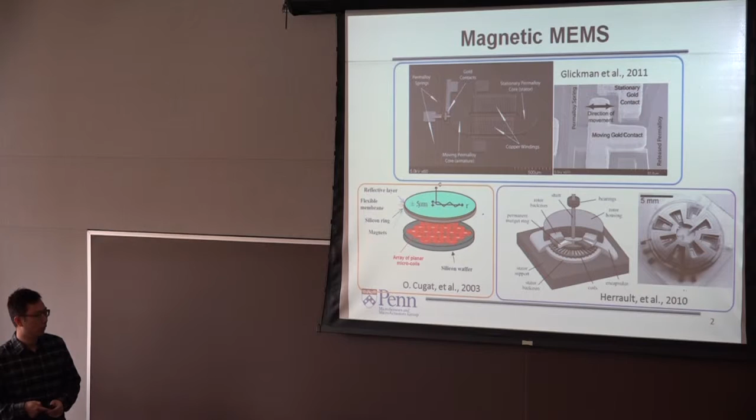Another example is a micromirror. This is very similar to the TI-branded DMD devices, but rather than using capacitive actuation, they use electromagnetic interaction here. And of course, one of the very classical magnetic MEMS devices is a micromotor, and this is one of the devices that we used to have in our group. So we mentioned that the permanent micromagnet is the passive magnetic source.

So from some perspectives it's actually better than current-carrying coils, both, as you can see, in energy efficiency as well as in terms of scaling.

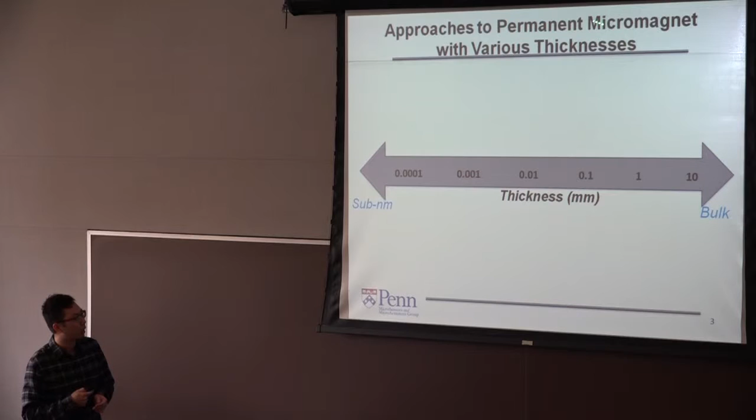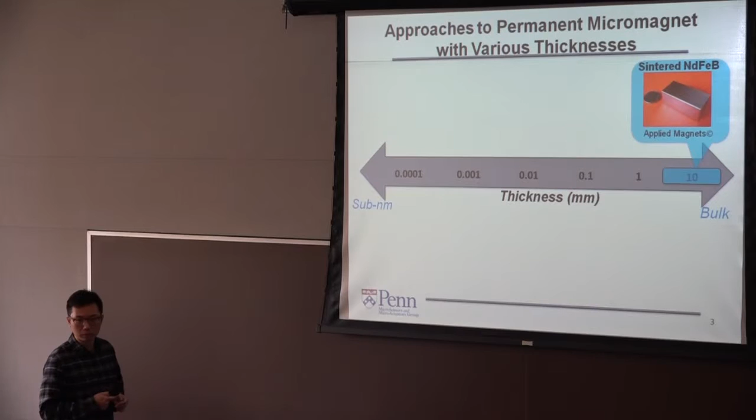So I want to give you a few examples of the existing approaches to fabricate permanent magnets. Let's go from the bigger scale to the smaller scale. In the bulk scale, sintering by powder metallurgy is definitely one of the dominant techniques. You have molten alloys in a protected environment in an inductive furnace, you melt it, and then you pour it into a mold. Once it's solidified, we have this kind of bigger shaped magnet.

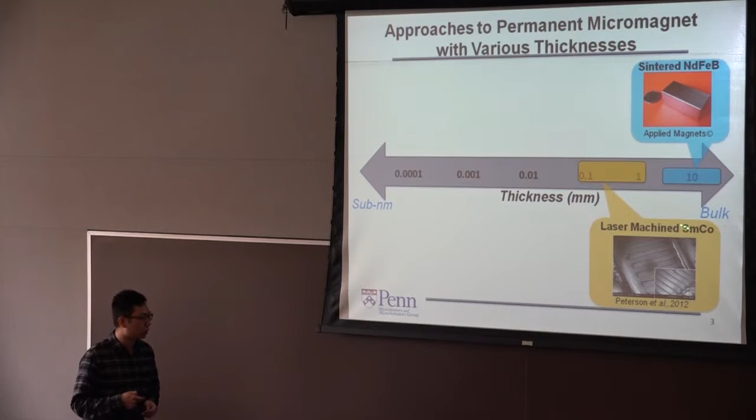This high temperature, normally 1,000 degrees C, is incompatible with the CMOS process. But more importantly, the scale is too big for MEMS devices. One way you can still utilize the sintered magnet is by further processing it, for example with laser micromachining, which we have an expert in our group to do.

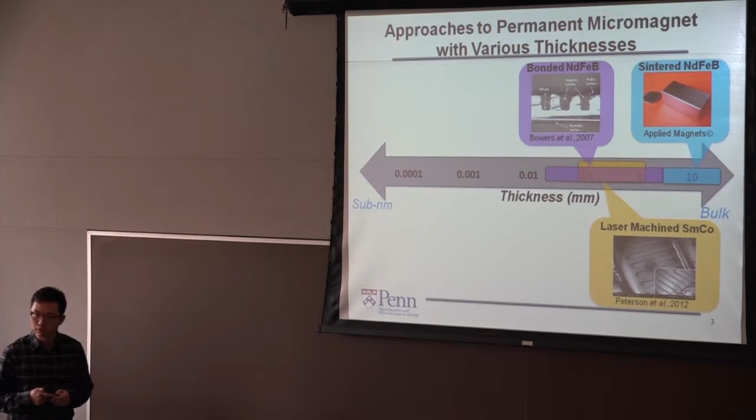At a similar length scale, you can use the bonded magnet. It's called a bonded magnet because it uses magnetic powders. They load the powders into a certain polymer, and then you can use different techniques. Either you do a screen printing-like technique, where you lap it into prefabricated trenches, or you blend this powder with photosensitive polymers and use traditional lithography to define it. The powder is normally micron-sized, tens of microns.

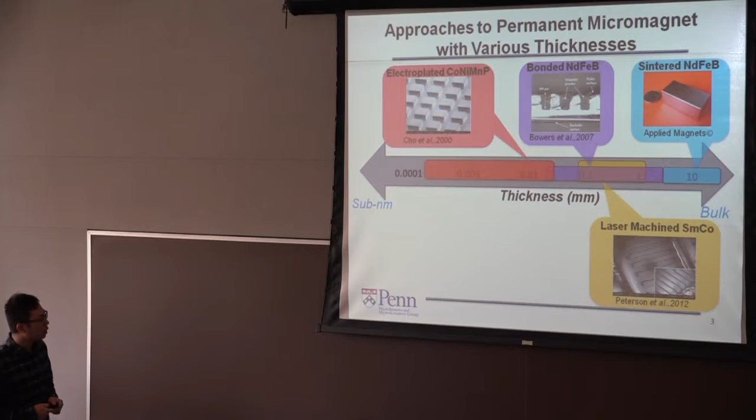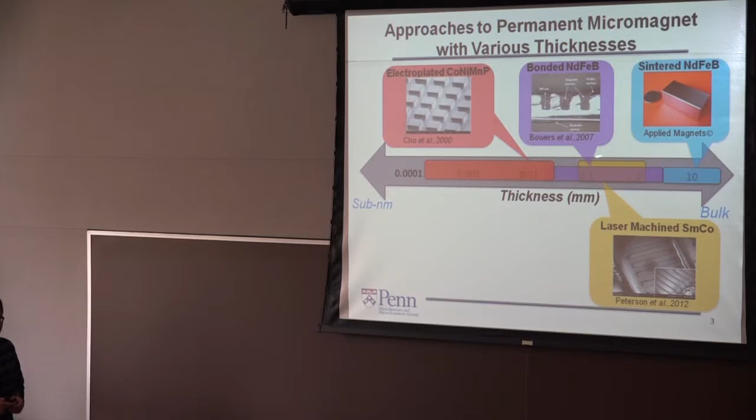If you want to fabricate a thinner magnet, electroplating is one of the methods. Here you can see a cobalt nickel manganese phosphorus alloy plated through a traditional UV-defined photoresist mold. If you want to plate it thicker, there are some constraints, which I will talk about later. A sputtered magnet is normally even thinner, and the deposition is slower.

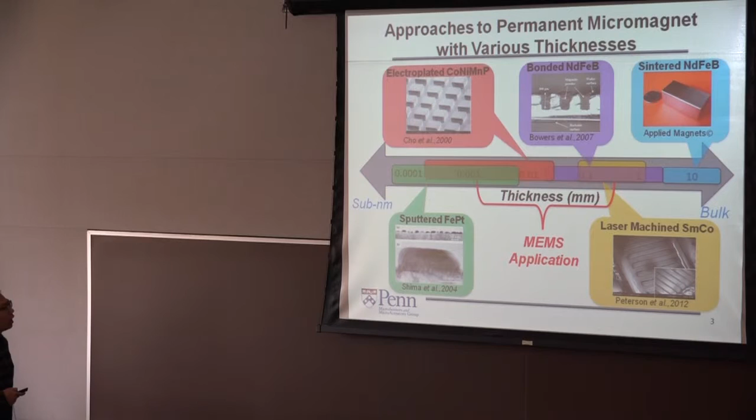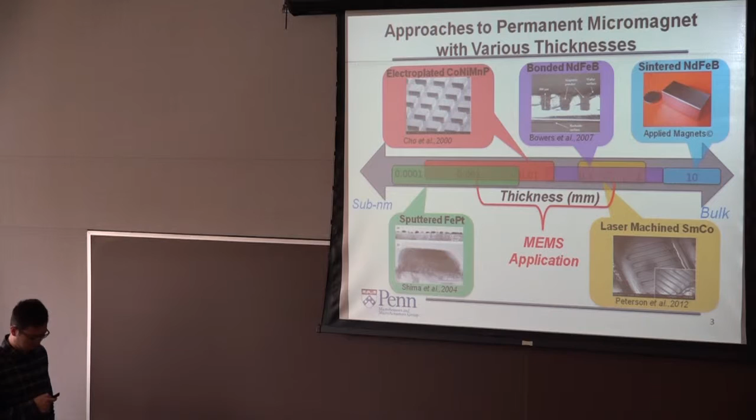As we mentioned, there is a length scale that is specifically important to MEMS: normally 1 micron to hundreds of microns is the perfect permanent magnet length scale for MEMS. Before I go to the main part, I will give you a quick refresher on a few magnetic properties that are important, especially for permanent or hard magnets.

The remanence and coercivity are defined by the hysteresis loop, its intersects with the B axis and H axis. Both parameters can be captured in one single parameter, the BH max. It's defined as the maximum rectangular area underneath the BH loop in the second quadrant. This is one of the primary parameters for characterizing hard magnetic materials.

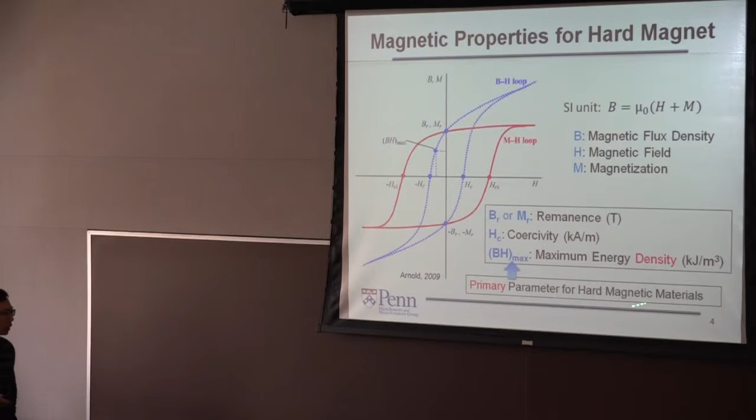In the previous slides, all the properties are volume-independent. On a device level, what we're really interested in is that you apply a certain magnetic material and hope the performance of your device is improved. So it's important to understand whether, at the device level, the volume-dependent or independent property matters. To understand that, let's see a few examples.

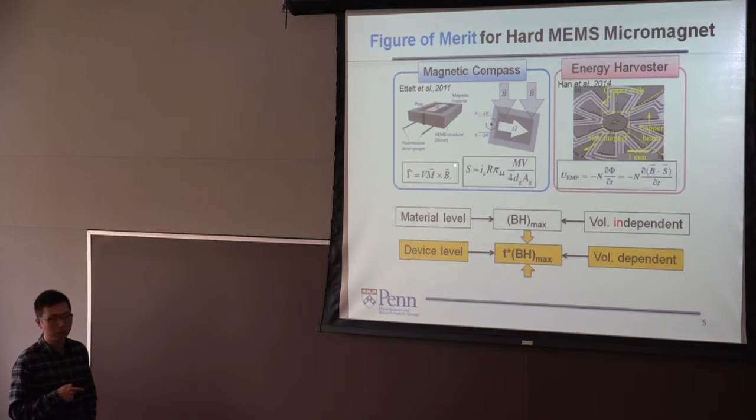The first one is a magnetic compass, one possible design utilizing the permanent magnet. The interaction between the earth's field and this permanent magnet creates a torque, which is sensed by piezoresistive strain gauges to determine the direction of the field. In the governing equation, both the torque and the sensitivity are proportional to the volumetric magnetization, V times M. So this is a volume-dependent property.

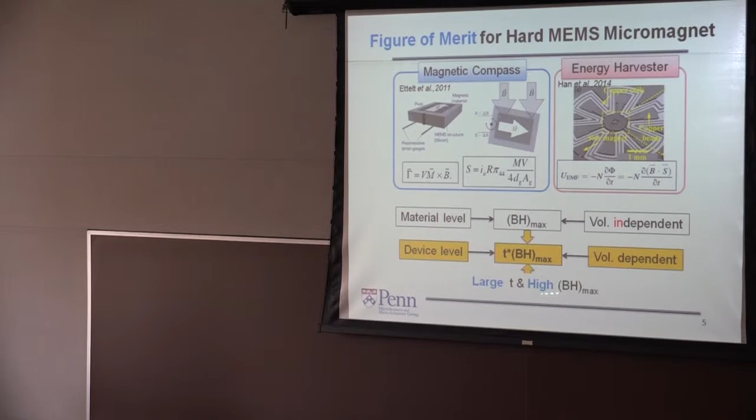Another example is a vibration-based energy harvester. The governing equation is the well-known Faraday's law. The induced voltage depends on the rate of change of flux rather than the flux density. So B times S, similar to V times M, is a volume-dependent property. It's clear that on the device level, we really want a volume-dependent property. Given a constrained MEMS footprint, what we really want is large thickness and high energy density at the same time for a permanent magnet film.

So that's not the only problem. The other problem is the mechanical stability. In general, these hard magnetic films possess very high residual stress. And as you know, when the film thickness increases, the stored strain energy inside the film also increases. And according to the Griffith criterion in fracture mechanics, when the energy release rate is higher than the fracture toughness, the film will have spontaneous cracking or delamination.

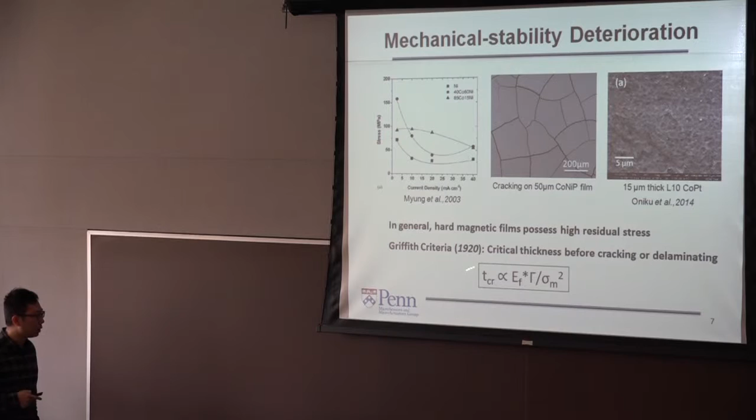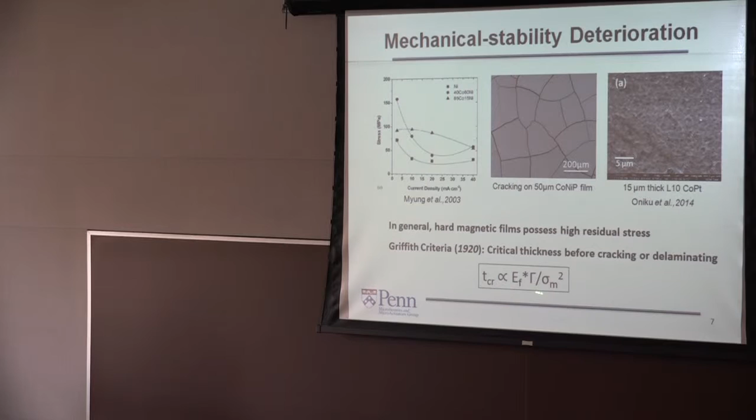So what that really means is there is a critical thickness for a film with a certain residual stress, beyond which the cracking will happen. And this critical thickness is proportional to 1 over the stress squared.

So given all these constraints, is there a way to have both large thickness and high energy density at the same time? We see that as thickness grows, the property decreases. And one thought is that since you suffer from this property degradation when you get a thick film, why don't you have thin films and stack them all together? So you can get both the good properties of the thin film and also a very large thickness.

So there are several ways to technically realize this. One way is a self-assembly sort of thing, where you are able to bring the films together with some favorable forces, let's say capillary forces. But one problem with that is the alignment between the layers is hard. And sometimes in applications you want a precise location of your magnet, and then that would be a problem.

So the way that we utilize here is sequential multilayer electroplating. It's a self-registered process plated through the mold, where you have the thin film A, which is the magnetic material, and some kind of non-magnetic material, and you plate them in a lamination structure to have this AB microlaminated structure.

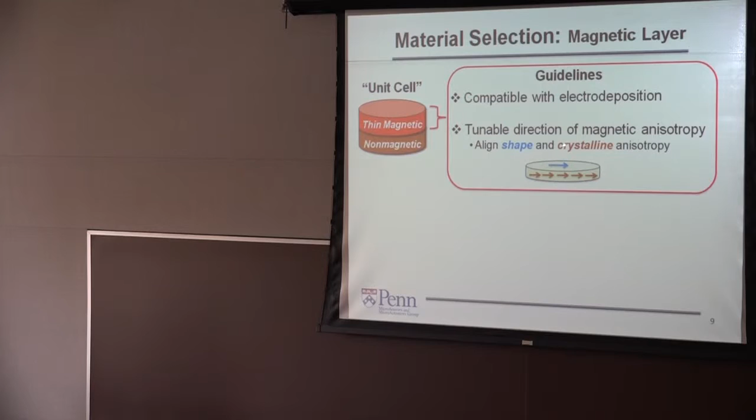And also, very importantly, we would like to tune the direction of this anisotropy in the same direction. For a thin film structure, the in-plane dimension is much larger than the out-of-plane, so the shape anisotropy lies in-plane. It will be beneficial if we can tune the magnetic anisotropy also in the in-plane direction, so that the overall property is boosted.

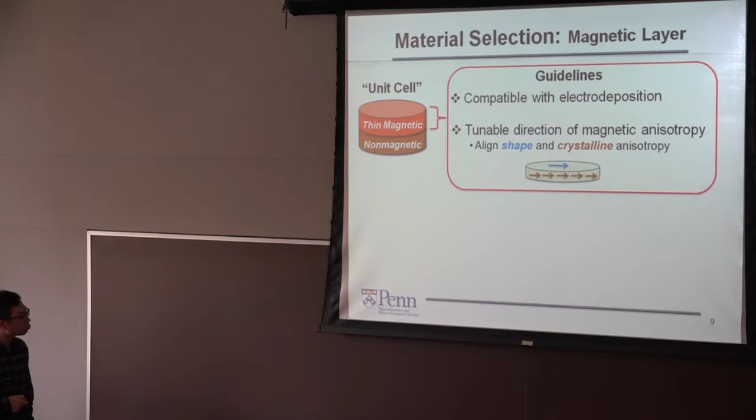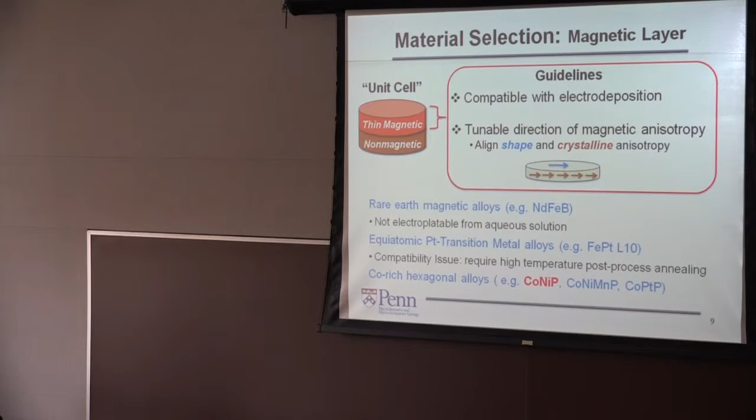So there are lots of existing magnetic alloys. I won't go into the details. But if you want a CMOS-compatible and integrated fabrication approach, cobalt nickel phosphorus is one good choice. And this is the magnetic system that we used in this study.

For the non-magnetic material, we call it the interlamination layer. Other than good electrical conductivity, we need it to have very low residual stress, so that the average stress is reduced. We'll talk about this later. It is hypothesized that this non-magnetic layer should have excellent planarization properties in order to fully reset the surface of the underlying magnetic material, so that the subsequent layers are well plated.

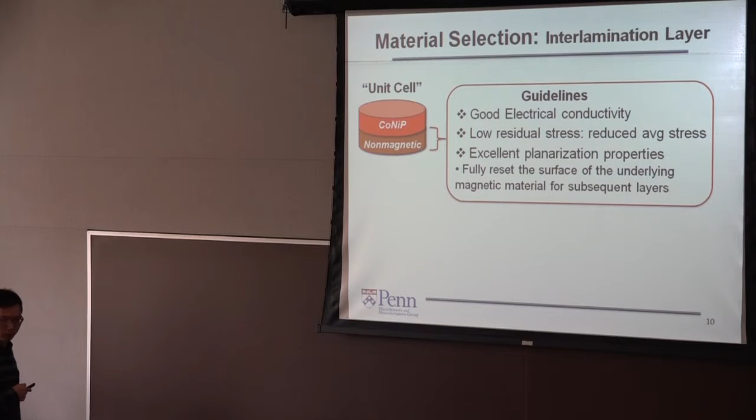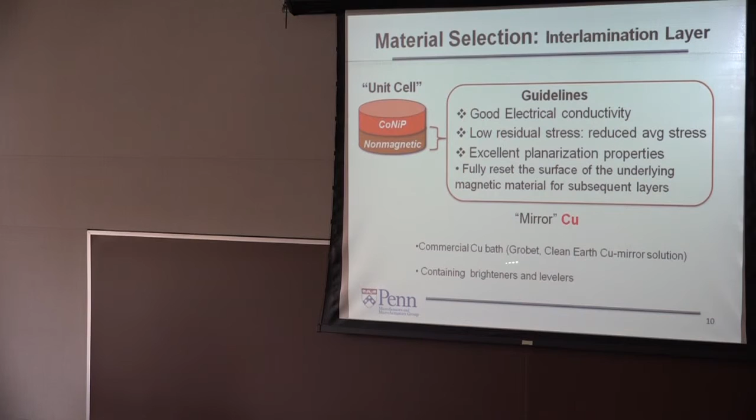And this is very important because we know that the interface and substrate have very important physical implications for the material properties of the multilayer structure. So it's one of the biggest concerns here. So what we chose is a very shiny, smooth-surface copper. It's a commercial bath, and it contains levelers and brighteners, for this interlamination layer.

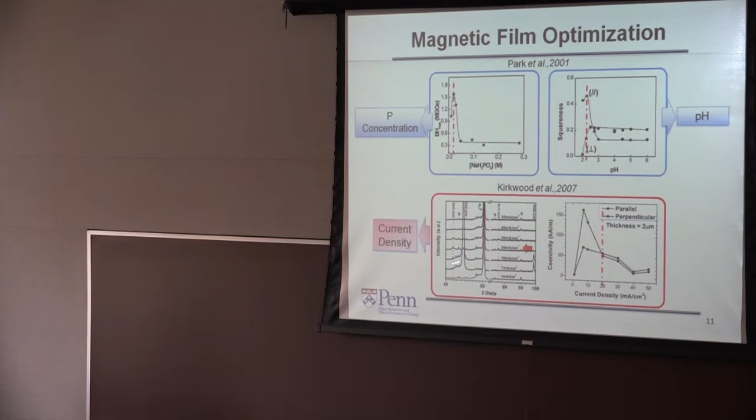So the next thing to do is to optimize the plating conditions and bath conditions in order to achieve what we proposed in the material selection guideline. We want a large in-plane energy density as well as in-plane anisotropy. So based on the existing literature, there are several important parameters we chose to fulfill this goal.

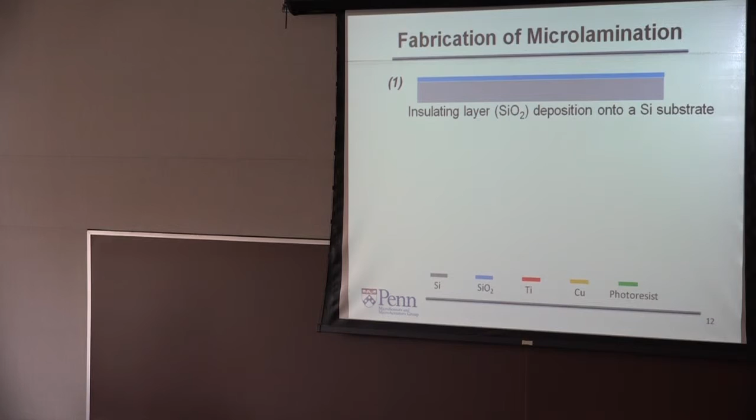So the fabrication part is a very traditional through-mold electroplating. You have an insulating layer deposited onto a silicon substrate, after which you deposit a seed layer for electroplating. And of course, you have to have a very thick mold in order to plate thick layers.

And basically, after that, you remove the Ti seed layer, and then you have a traditional electroplating. But we utilize a robotic controlled system to do the multi-layer electroplating. So we use the cobalt nickel phosphorus bath, which we customized to optimize the property, and the copper bath, as we talked about. So I'll show you a video about this process.

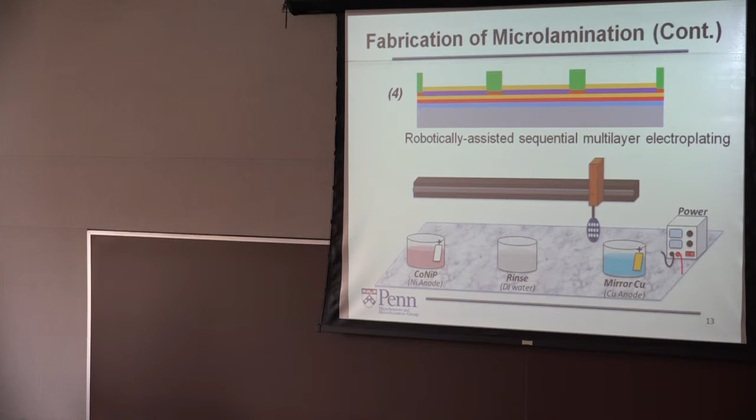All right, so after electroplating, you remove the mold, and you basically inspect your cross-sectional image in SEM. And here we show a 10 pair laminated magnet, and this is an enlarged view. So we do a selective copper wet etch to give you the contrast. This white protruding layer is cobalt nickel phosphorus, and the receding layer, because it's etched, is copper.

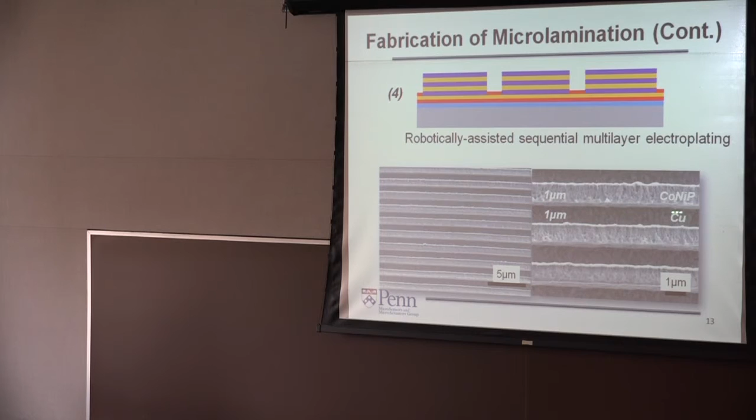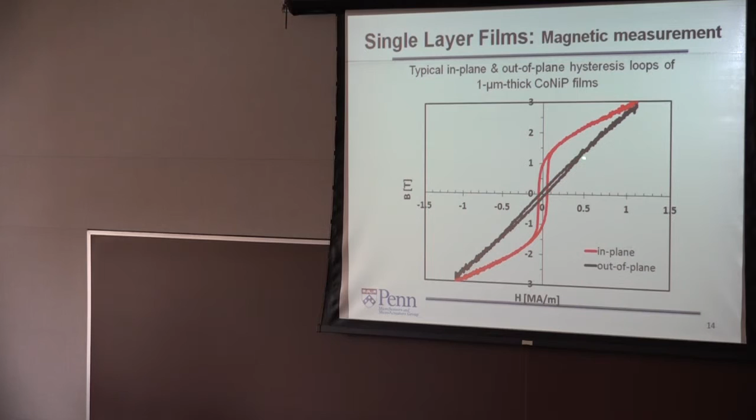So after the optimization, right, what do we get? So here is the 1 micron thick single layer cobalt nickel phosphorus film measured by VSM to check the magnetic properties. So as you can see, as desired, we have a relatively large in-plane BH max compared to the out-of-plane, and also the magnetic anisotropy lies in the in-plane direction.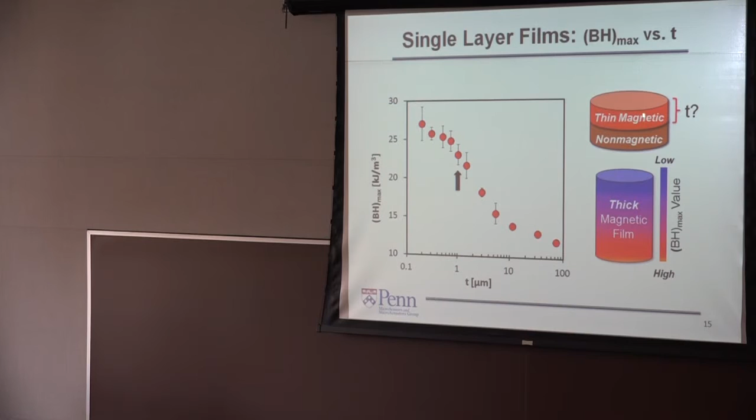So as we mentioned in the introduction, if you have a very thick film, for a lot of permanent magnetic systems the energy density drops as the thickness increases. And it's the same in our system, the cobalt nickel phosphorus. As you can see, there's a sharp drop between 1 to 10 micron. So one other thing you can find out from this plot is that you can determine the magnetic layer thickness in this laminated structure, right?

Certainly, given the assumption that you can retain or preserve the thin film properties, the thinner the magnetic material you choose, the better the property. But there is a trade-off, right? If you choose a very thin layer, the process complexity will increase. But definitely you won't want to choose something that has already sharply decreased. Right? So 1 micron is what we choose here to be the magnetic layer thickness.

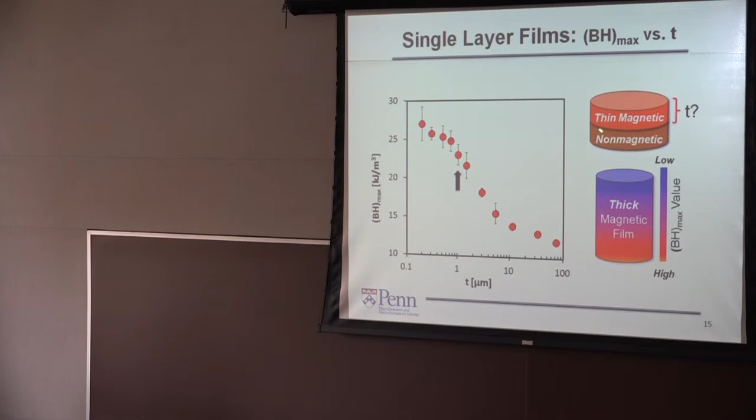So we also want to check using XRD whether we have the well-defined in-plane texture. So we see a relatively large HCP 100 peak compared to the 002. I didn't show the data from the powder form, but as you will see, this in-plane peak is much higher than the out-of-plane, indicating the c-axis of this HCP structure is aligned in the in-plane direction.

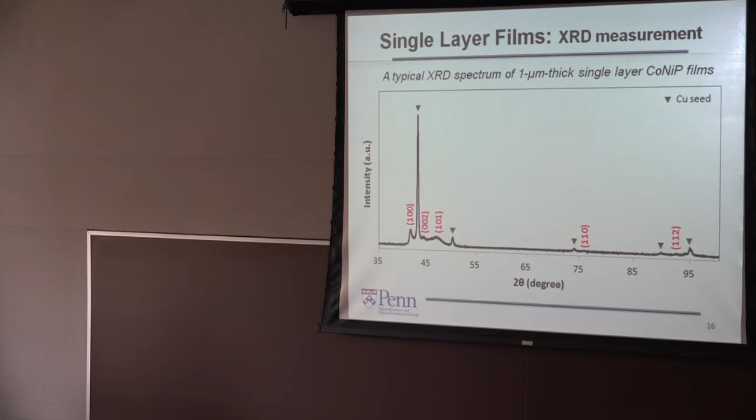So before we go to the laminated films, I want to mention a few things. We introduced this notation to represent the laminated magnet. T cobalt nickel phosphorus is the cobalt nickel phosphorus thickness, and so is the copper. And N is the number of pairs. One pair is composed of one layer of cobalt nickel phosphorus and one layer of copper. The total magnetic thickness is the sum of the cobalt nickel phosphorus, and so is the copper. The total thickness is the sum of these two. And one important thing is the fill factor. It's defined as the total magnetic thickness over the total thickness.

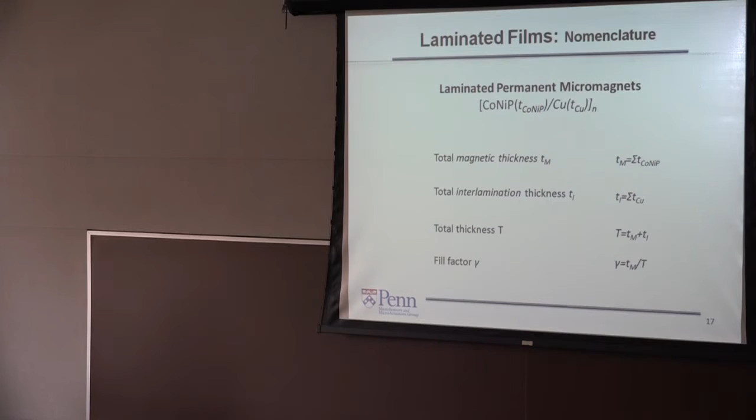So as you see, other than the first layer of cobalt nickel phosphorus, all other magnetic layers are built on the underlying copper layer, right? We know that the interface has an important role in the material properties. So we want to do a controlled experiment to understand the underlying role of this copper interlayer. So here we have a 5-pair cobalt nickel phosphorus, 1 micron, with various copper thicknesses. And we measure the top copper layer roughness using AFM.

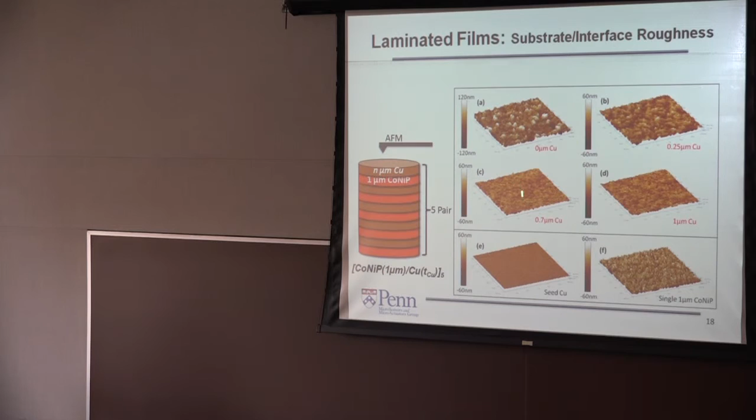And these are some representative scans shown here with increasing copper interlayer thickness. For your reference, the seed layer copper is shown here, and the single layer 1 micron cobalt nickel phosphorus is shown here. As you can see, when you increase the interlayer thickness, intuitively it smooths out the surface. The detailed roughness data is shown here. Ra is the arithmetic mean, and Rq is the root mean square.

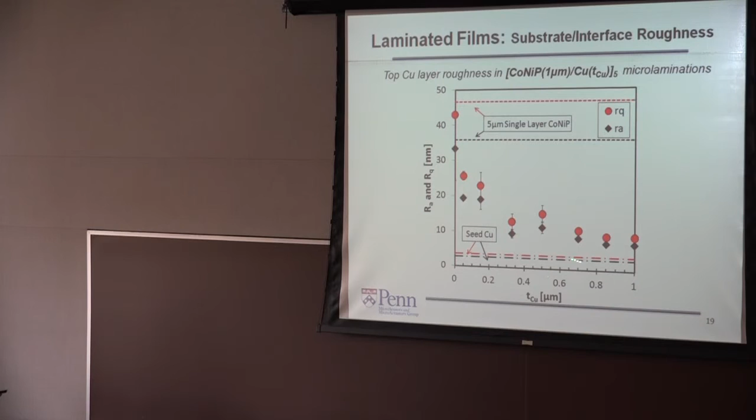As you can see, when the interlayer thickness increases, the roughness decreases and plateaus. And it's bound by two limiting scenarios, the 5 micron single layer cobalt nickel phosphorus and the seed layer. So there are two conclusions you can draw from this plot: the 5 micron single layer has the highest roughness, as expected. There is no planarization effect. And increasing the copper layer has an increasing planarization effect, smoothing out the surface towards the roughness of the seed layer.

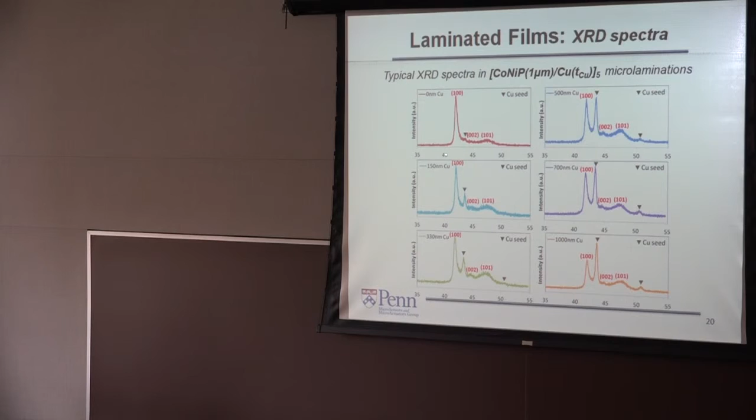And we also do XRD on these laminated structures to compare with the single layered counterparts. By comparison, we found there are no additional or missing peaks for the cobalt nickel phosphorus. But there's one thing that changed. By analyzing the peak 100, we found, using the Scherrer equation, that the grain size decreases as the interlayer thickness increases. This is very similar to the trend of the roughness, and it's also bound by two extreme cases, the 5 micron and 1 micron single layer case.

Of course, we also do the magnetic measurement by VSM on this 5-pair lamination. Interestingly, you can see that both the energy density and the coercivity increase as the thickness increases, but the remanence stays relatively constant, within 7%. So I want to draw your attention to this specific point. There's a very important implication here: this is copper thickness equal to 0. What this means is the robot pulls up the thin film every 1 micron, 5 times, because it's a 5-pair lamination. So purely interrupting the electroplating periodically doesn't help increase the magnetic property. What's really important is the planarization effect from the interlayer.

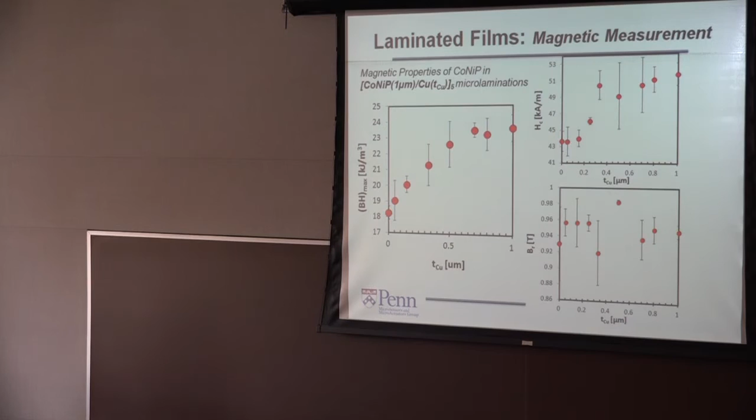So now you know the chain reaction, right? Increasing the copper layer reduces the interface roughness and further reduces the cobalt nickel phosphorus grain size, and finally influences the properties, especially the coercivity and BH max.

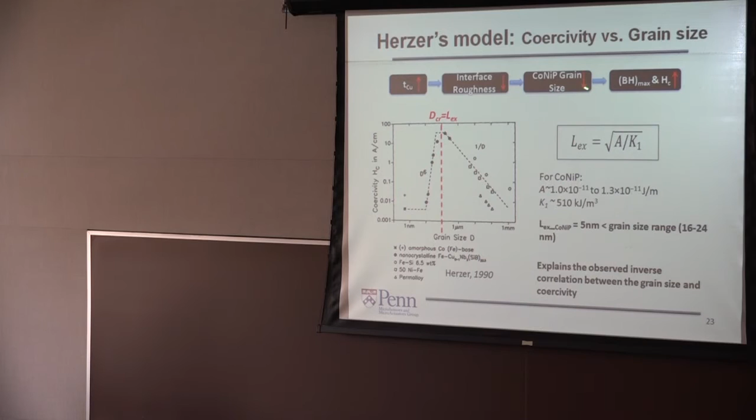The interplay between the grain size and the coercivity specifically can be understood by a theoretical model proposed by Herzer. Basically it says that for an assembly of small grains, the competition between the anisotropy energy and the exchange energy determines whether the coercivity is proportional to d to the 6th power or 1 over d. The dividing point is when the grain size equals the exchange length. For our system, cobalt nickel phosphorus, the calculated critical grain size is 5 nanometers. As you recall, the grain size lies between 16 and 24 nanometers, which is on the right side of this 5 nanometers. So this explains the inverse relationship between grain size and coercivity.

We mentioned at the very beginning that mechanical stability is also one of the important factors limiting the overall thickness. So we want to talk a little about that. There are several ways you can reduce the stress so that you can increase the thickness, including, but not limited to, these few things: for example, changing the current density, changing the additives, or using other techniques. But as we know, the magnetic properties are very sensitive to the plating conditions. And for cases where the magnetic property is predetermined, say you want a specific coercivity, or an in-plane anisotropy bigger than the out-of-plane, these techniques might fall short.

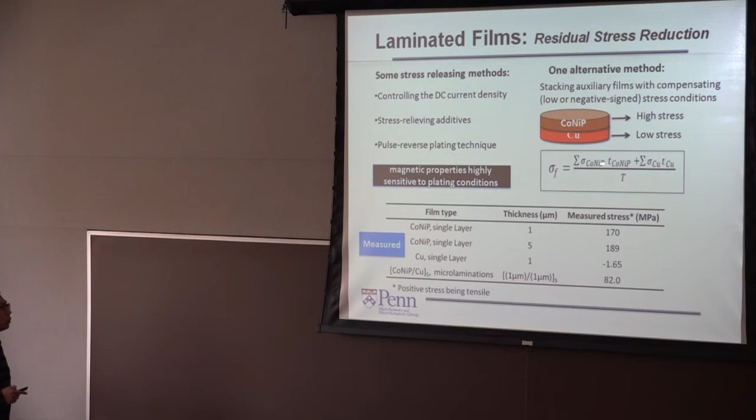One alternative is to stack your targeted film with auxiliary films that have compensating stress conditions, for example, a low stress or negative stress condition. Studies show that for a multilayer structure, the average stress can be represented as an individual layer weighted stress, under the assumption that the multilayer is thin and everything is in the linear elastic regime. So we want to understand whether this formula applies to our system.

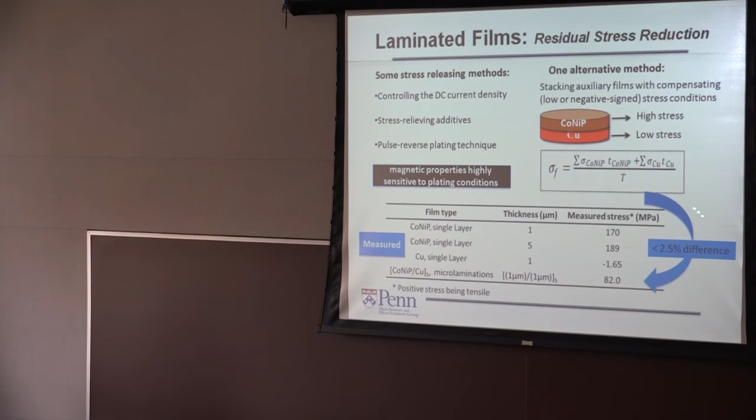So we measure the residual stress of single layer and multilayer structures with a profiler based on the Stoney equation, utilizing the film curvature. As you can see, the relatively low stressed copper single layer reduces the average stress of the cobalt nickel phosphorus to almost half of the 1 micron single layer and 5 micron single layer. And note that this measured stress is very close; the error is less than 2.5%.

So after all this analysis, what a device guy really cares about is you use this, no matter whether it's a single layer or a laminated magnet, as a black box. You plug and play into the device, and hopefully the one that you propose has a better property. So the advantages of this laminated structure can be demonstrated utilizing two cases. The first one is when the magnetic thickness is of concern, and the second one is if the total thickness is of concern. So let's talk about this case first.

So as we know, there exists very high residual stress in the magnetic layer. And along with the fact that when you increase the magnetic thickness, the total strain energy also increases. So in this sense, delamination would be the factor that prevents you from getting an even thicker film. So in this case, the total energy is related to the magnetic thickness rather than the total thickness. And here we show you a plot of BH max versus the magnetic thickness.

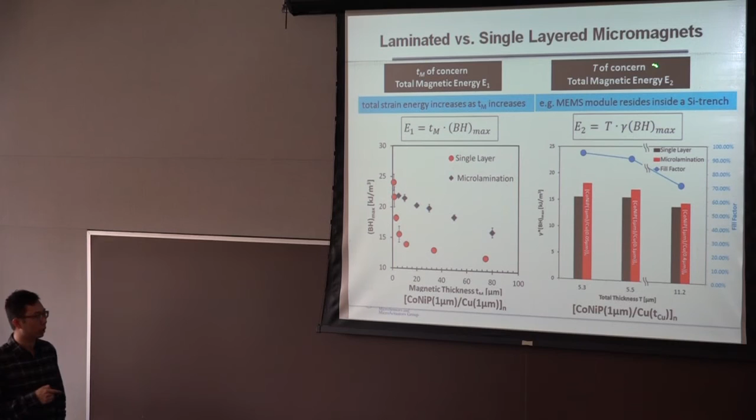So another case is when the total thickness is of concern. For example, let's say the MEMS module resides in a prefabricated silicon trench. So the total thickness is constrained. And then we have to think about the strategy here: even though, let's say, you decrease the copper interlayer thickness, you less preserve your magnetic properties, but this will be compensated by the fact that you now have a larger magnetic thickness because the overall T is constrained. So in this case, it's the total thickness that matters.

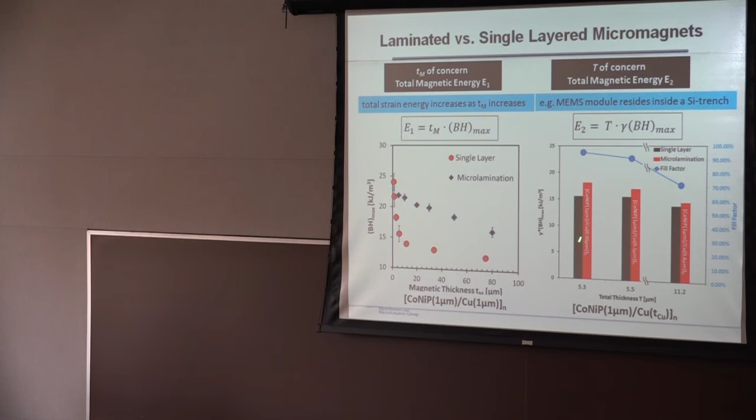And here we show you a plot comparing the fill factor modified BH max versus the total thickness. And here are some possible designs where you can utilize the opposing effect of the fill factor to achieve that, with the same total thickness, your laminated structure can still have a larger total magnetic energy compared to the single layer.

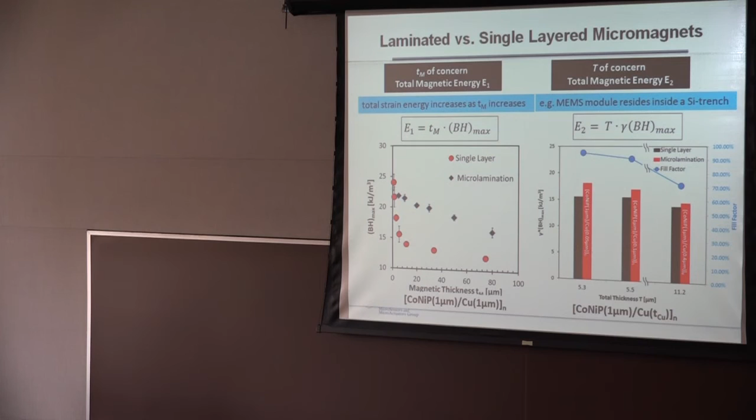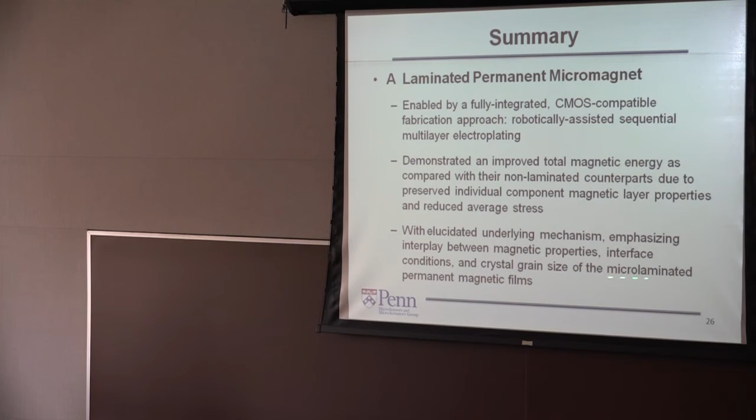So to summarize, we propose a laminated permanent micromagnet enabled by an integrated and CMOS-compatible fabrication approach. We demonstrated that the overall total magnetic energy can be improved using this laminated structure in different scenarios. And we also understand the underlying mechanism, emphasizing the interplay between magnetic properties, the interface conditions, and the crystal grain size of the laminated structures. That will be my talk. Thanks.

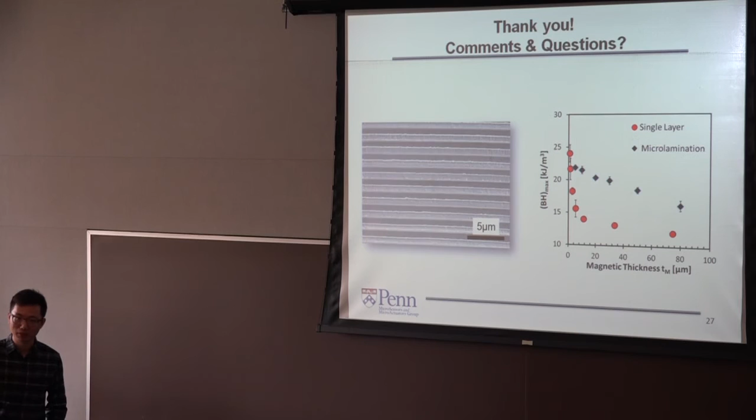Welcome any questions. Have you looked at the magnetic field for in-plane multilayer structures? Close to the surface, the edge? So we haven't yet. I guess the next step probably is to use COMSOL to simulate that first, because that's also related to the next step, to the device level. But I understand why you asked that. You want to ask whether there's a closed loop of the flux or not. Or an oscillating field pattern. Right. Yeah, we haven't done that yet.

Are there any more questions? So MEMS is very, very practical and kind of aggressive. So in terms of mass production, what would be the optimized process time? For example, stacking up to 500 layers or 100 layers. What will be your targeting process time? So I think that's a very good question, and this also relates to the precision of the process. For example, for the self-assembly case, you can basically trade space for time. If you can self-assemble it so that you have a very small amount of lamination but a very large area, and then you bring it together.

That all depends, I think, on the device itself. But for this specific process, you have very few knobs to control your total time. It always depends on the current density that you choose. That's also related to the magnetic property. So I think it's fairly constrained if a certain magnetic property is targeted. Of course, if you are pretty flexible with that, you can change the current density and such.